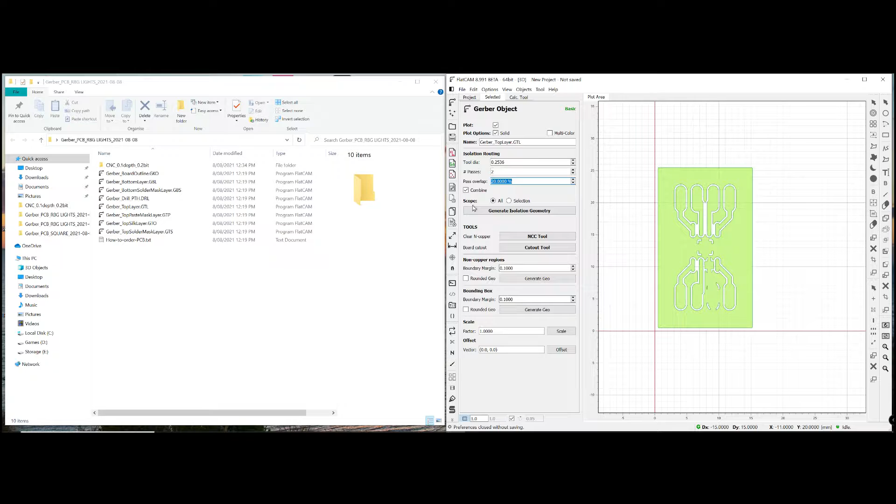The next thing we're going to do is click combine. What this combine does is basically combine your 2 passes into one file rather than 2 separate Gcodes. So that's fine - scope all, then generate isolation geometry. You see all these red lines everywhere - that's where it's going to be cutting.

Okay, so we're going to be cutting at a depth of 0.1 millimeters. Because this is a negative value, you have to put negative 0.1.

I just ignore multi-depth for the moment. The travel Z is just basically how far above the material it'll be traveling. I put 2 millimeters, which should be sufficient for a PCB.

End move is when it finishes doing its cut - how high it wants to be lifted off the board. I put this as 5, that should be enough for me. I think based on everyone's experience, 5 should be enough.

X and Y was 120, the Z at 60. Spindle speed is how fast the spindle is going to be moving. I'm going to put 1000 RPM because that's what I choose.

Some machines you don't have that option, mine does - I'm going to put it at 1000. And that's it, generate CNC object.

So you can see these blue lines - this is where the thing will be cutting on.

We're happy with that, so we save the CNC code. You can view the Gcode by clicking here, so you can see what it's doing.

I'll just click save, and we'll create a new folder so we're going to pop everything in there. So CNC, 0.1 depth, 0.2 bit, and we're going to say that is 2 passes.

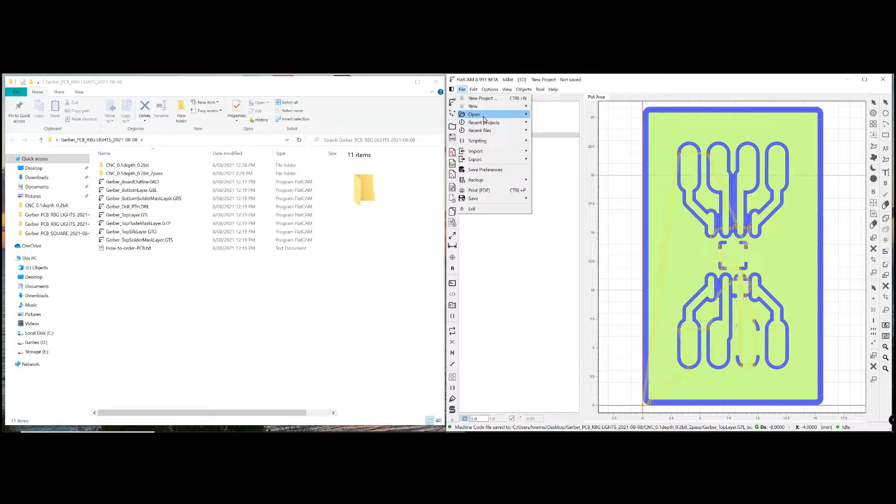We'll go to File, Open, Open Excellon. Go to here, here, okay.

The one that we wanted is this file here, the Gerber drill PTH.

Now we need to move this as well so that it aligns to here. So click here, move, here. So this is where I want it to be, and there we go. Now that's where the holes are going to be as well.

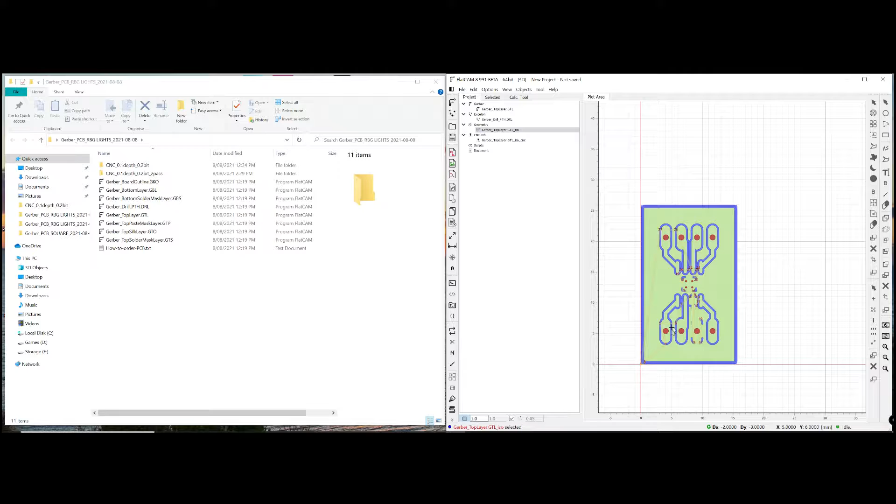For me, I don't need these holes here and here, so I'm going to remove them. The way you do that is you right click, edit. This menu will allow you to do some changes.

Actually, I should probably close the editor because I'm not going to do it here. No.

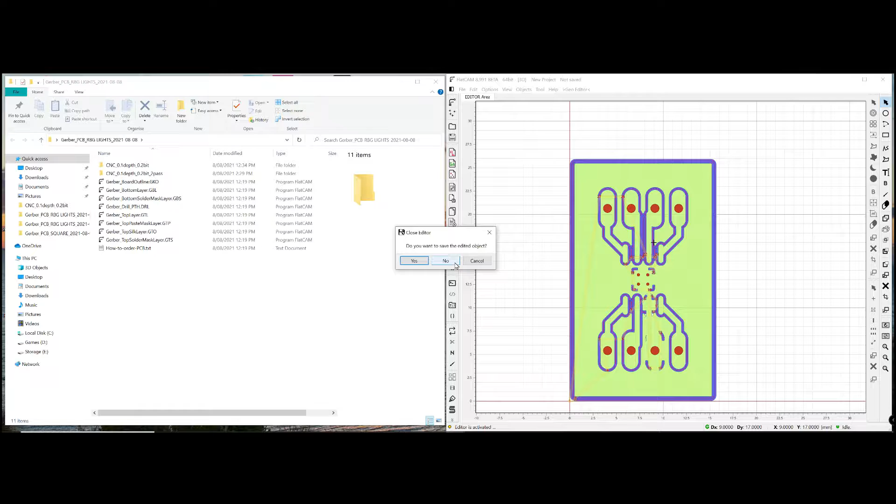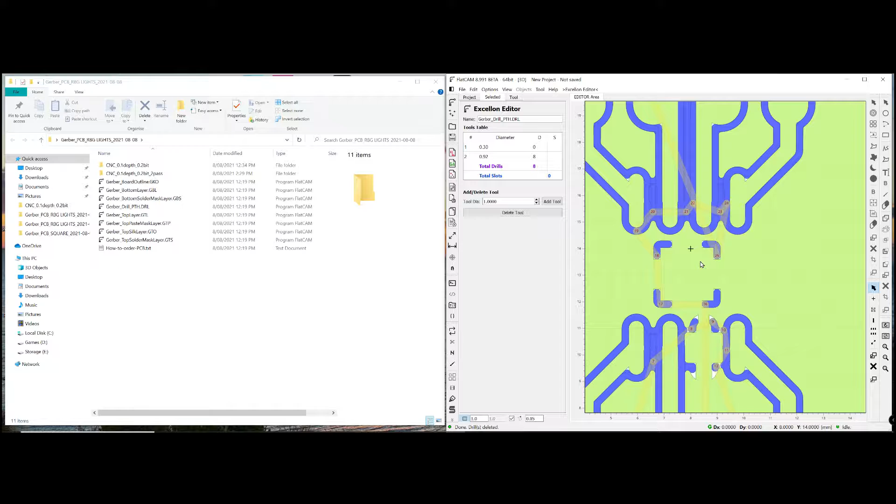Drill path. Right click, edit. This menu pops up, great. So I don't need these 4 crosses, these 4 holes, sorry. I'm going to click delete drill and just click on these ones, then press delete on the keyboard repeatedly. You can see the count going down. That's good, so we only have 8 holes to drill, which are just these big 8 ones.

Once that's done, just right click, close editor, and save your changes. Now the original drill path is still available, so we're going to right click and delete that. We don't need it, and that's it.

Now we haven't done anything in terms of converting to Gcode yet. Now we're going to do it for the drill path, so double click on the drill object. The depth for this one will say negative 2 millimeters, because we're going to create holes. Travel Z, we're going to leave as default and end move.

This is the reason why you'll see in the video that my bit breaks, because I put 0.5 whereas this is meant to be 5. Feed rate 300, that's fine. Spindle speed, I'm going to put 1000 like before, and then create Gcode, and that's it.

The bit that I used for this was 0.7 millimeters in diameter. And then create Gcode, and that's it.

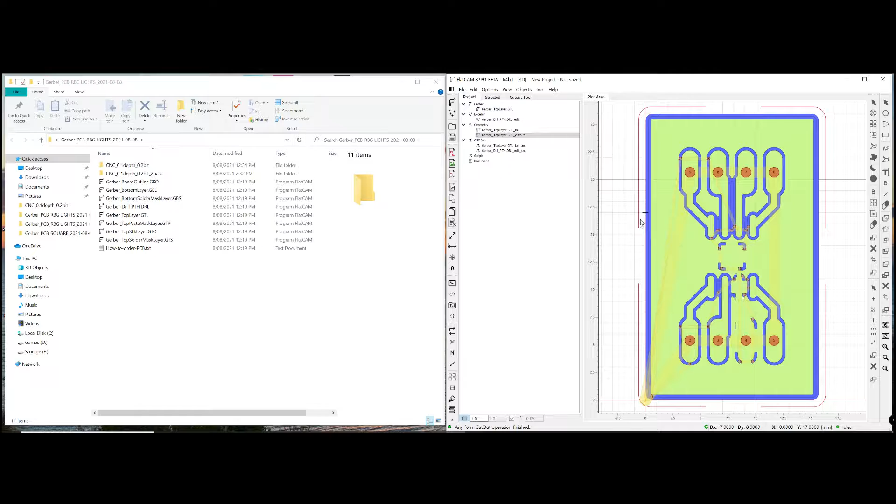The gaps are basically where you want the tabs to be. I like to use 4, and then create generate rectangular geometry, and there you go. So basically, it will start cutting here, here, and then here, here, here, here.

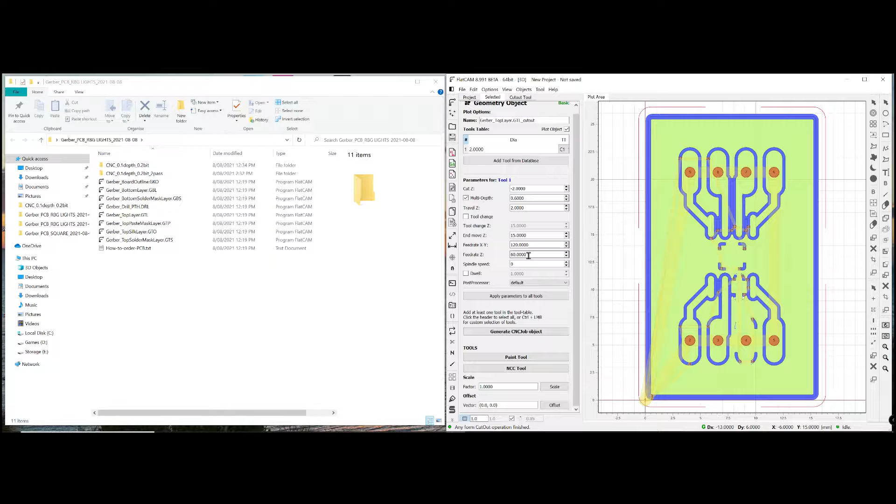Okay, once that's done, you go back in there, and then generate CNC object. So negative 2, 0.6, 2, 15, 120, 60. Actually no, end move for this is going to be 5. Okay, that's it, and generate CNC object.

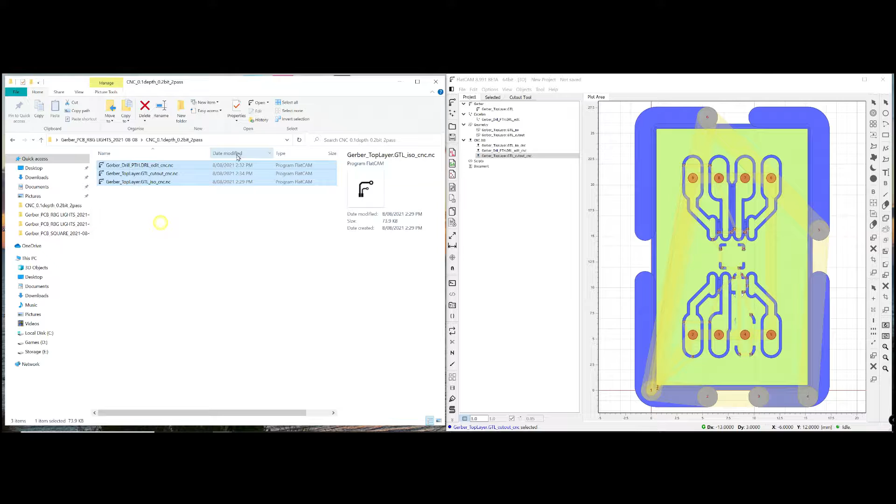There you go. And then save CNC code, save it. Basically you've got the 3 codes that you needed, saved here on my left side, you can see it here. 2 passes. Basically you just transfer this to the computer you'll be using to run Candle, and we'll go from there.

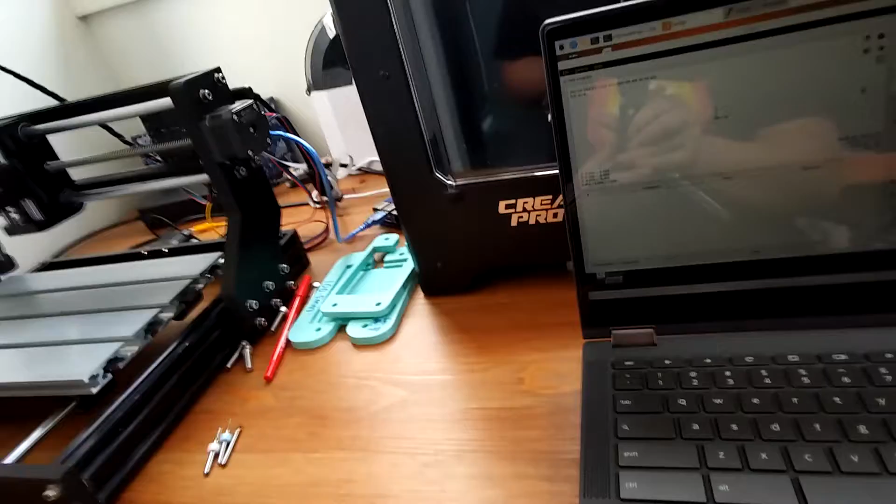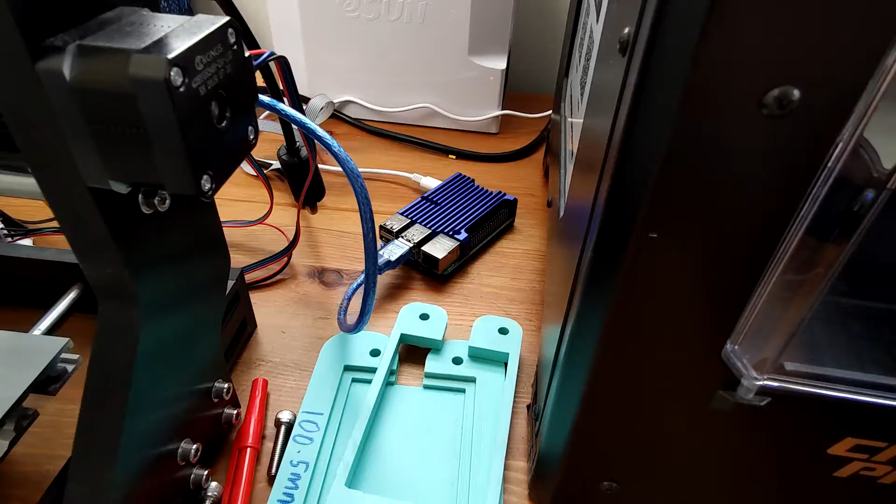Okay, so we're going to start off with the software. I'm using Candle to control the CNC machine. I have a Raspberry Pi running, communicating with the control board, and that's the CNC machine. These are the bits I'll be using. This one is the one I'll be using for doing the isolation routing. This one will be used to drill a hole into the PCB, and this one is used to cut out the PCB by creating tabs.

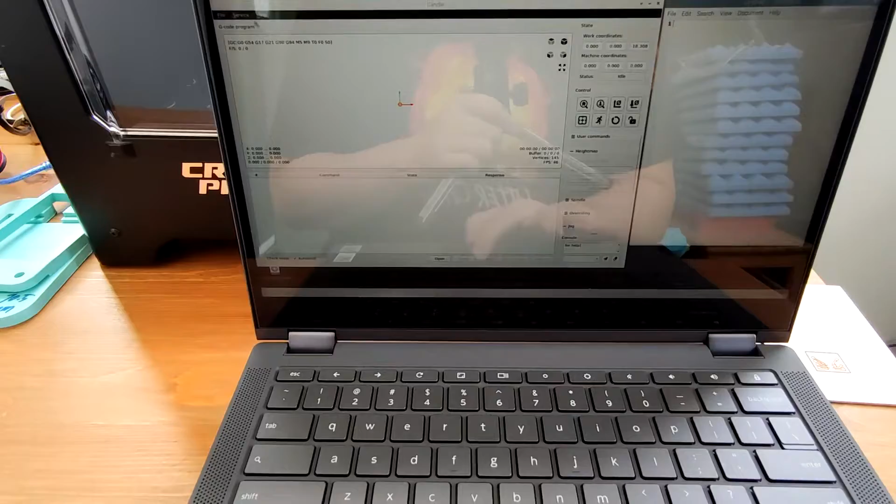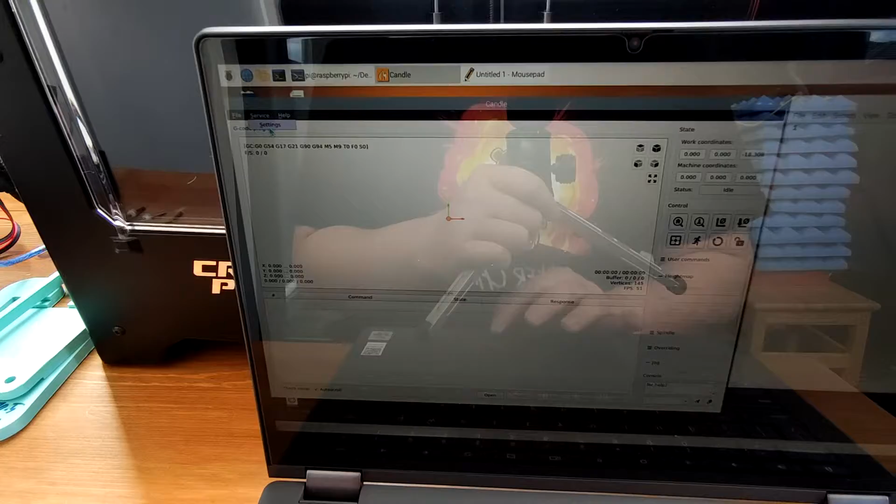Okay, so we'll begin with the software. Right now I've already paired it up, so just go to Service, Settings. Service is up here. In terms of how it's going to work, it's the same way regardless if you're on a Windows PC or perhaps even Mac. So this is a remote login, not virtual, sorry, remote logged into the Raspberry Pi right now. So we go into Settings, and we'll see this menu.

Choose the USB port that's connected to the CNC machine, and then set the baud rate to 115200. This one is ignore error response - I untick this. You want the error message to pop up, but if by accident you click ignore responses in one of the pop-up messages, just come back to settings and disable this, and you'll be fine.

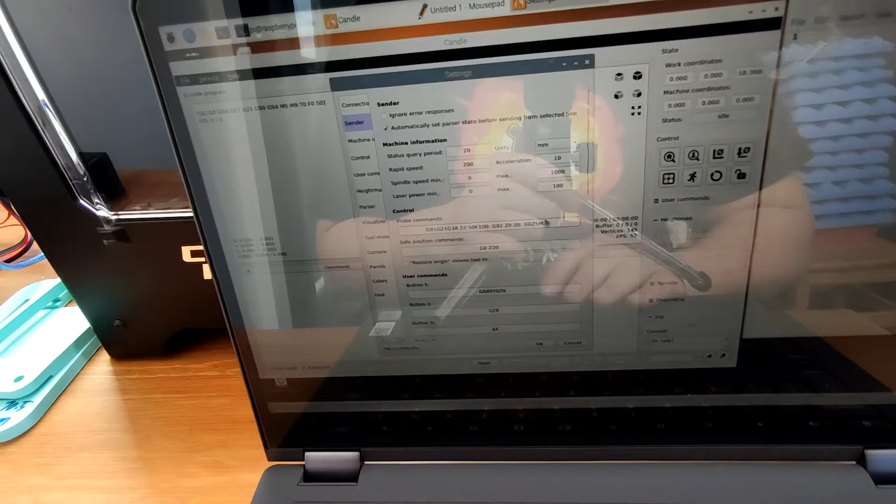These are all default values, I've not touched these ones. This particular string I copied from SainSmart's tutorial - I'll be posting a link to where you can get that. Basically, this is used for the probe mechanism to be used.

That command is by default there, you can ignore these ones. These are commands that I made myself just for usage. If you're using probing, I suggest putting the probe feed to about 50. I found that to work quite nicely.

Then after that, everything else is left at default. I've not changed any other configurations besides these ones, but these are just to display the commands being used. Everything else remains the same and unchanged. Okay.

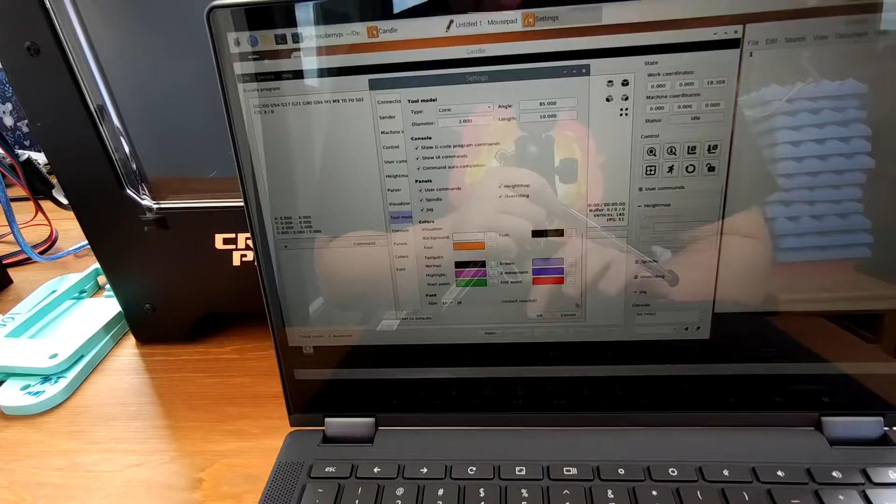After you've made those changes, I suggest closing Candle and reopening it again.

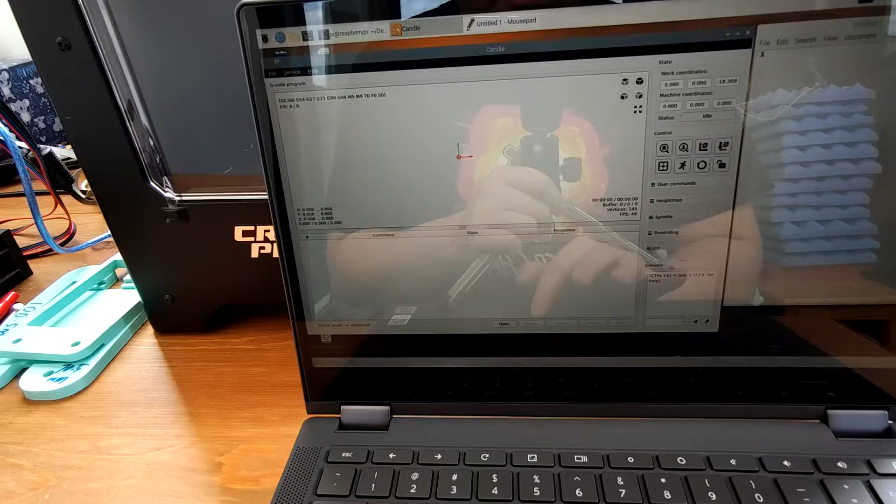Just to make sure the CNC machine is connected to your computer, the status should typically be idle. To see if it's actually able to move, go to the jog menu. Click on those three lines and it'll pop up like this.

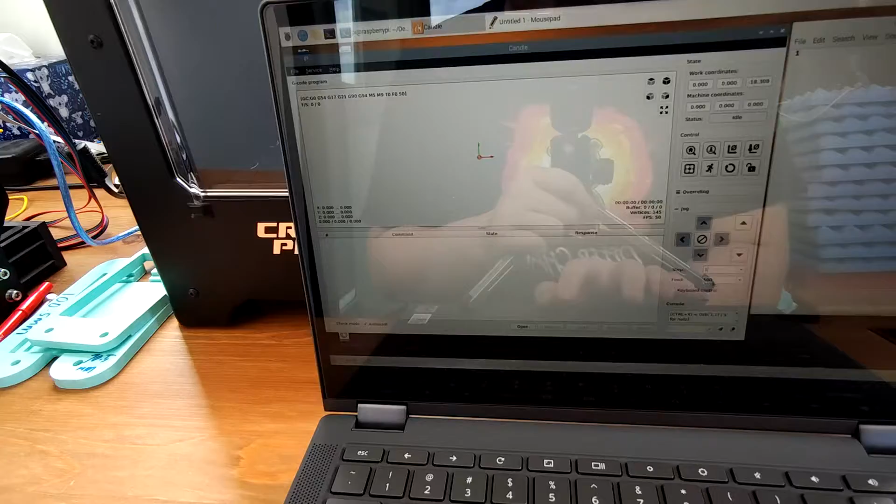Before you do anything, make sure the step is set to a small amount, because you don't want to move it too fast. So it's at 1, and the feed I found good for my CNC 3018 Pro was 500.

Let's try it. I'm going to press up and the CNC machine is going to go up. Actually, no, sorry, this is the up button, so this is actually for the Z axis. As you can see, the notes that pop up show Z minus and Z plus. If I press this one, it should go up 1 millimeter. There you go, it's working.

Before we move on, I'd like to show you my configuration. If you have a CNC 3018 Pro, you might find this useful. I'm just going to pause here for a second.

To get the configurations, I'm going to clear the console first, so this just clears everything on the console. Now just press that, and the output is presented here. You can scroll up if you want to see it. I'm going to copy whatever's in there, and then you can read it on this text file.

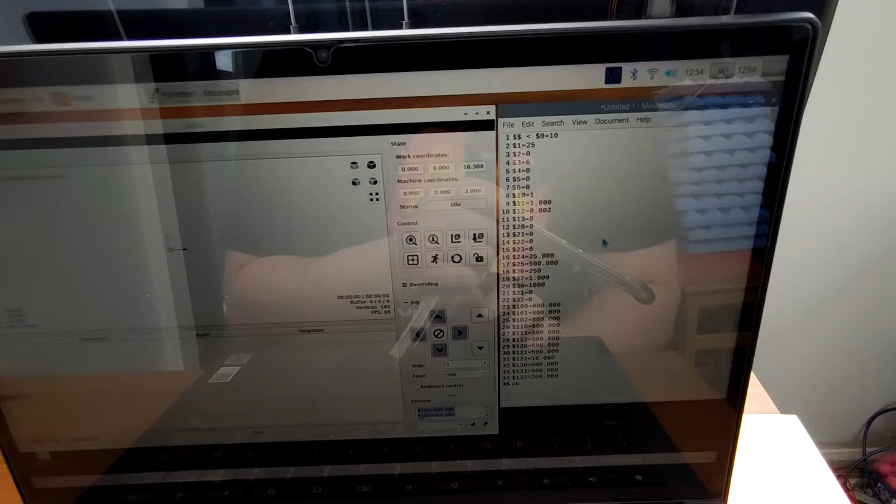These are the configurations for the CNC GRBL software running on the control board. The ones that I've changed are number 3, the $3 setting, to 6, which changes the direction of the axis rotation, or inverts them, which is the proper way of describing it. Not sure if my bookmark's still there.

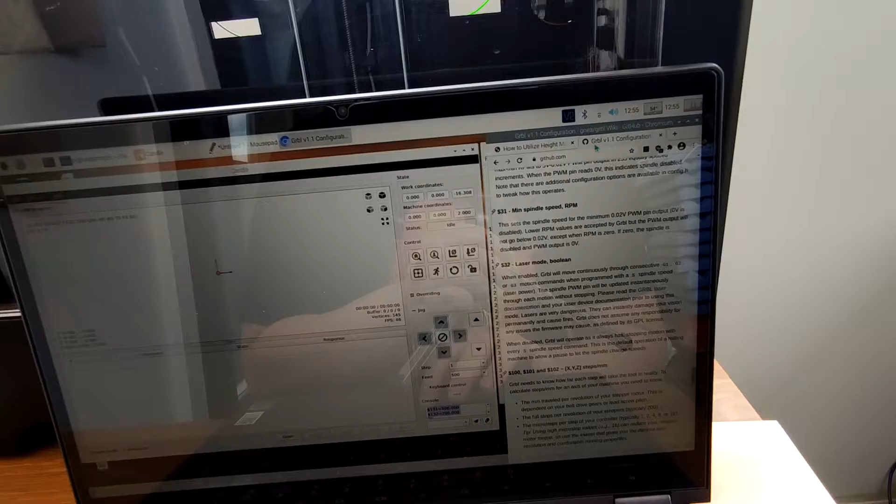Let me just pause here and see if I can get the menu up. Okay, we're back. I just went to GitHub and typed in GRBL configurations. The version I'm currently using is 1.1.f.

These are the settings for the GRBL configurations. I'm just going to scroll up here so you can see it. Number 3 is for direction port invert mask, so you click that. This is the configuration to change the direction of the X, Y, and Z axis. Just refer to the table above it.

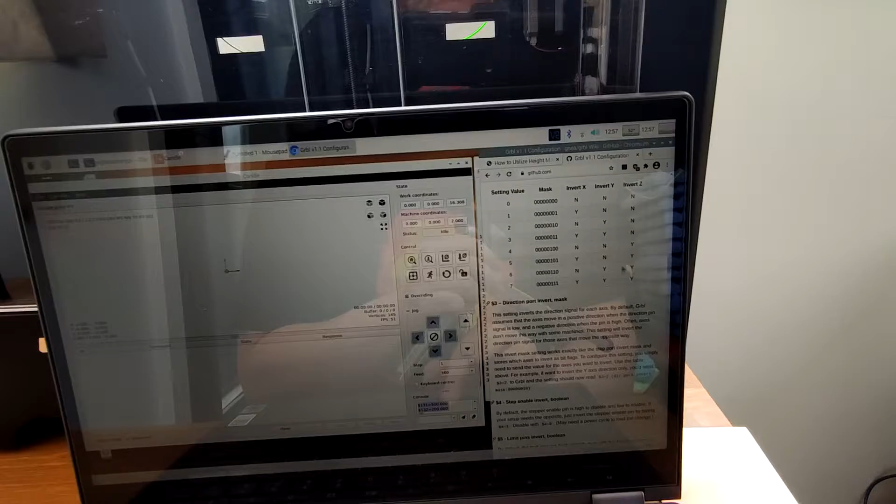So to read this table: if you don't want to invert any of the axes, set the value to 0. If you want to invert just the X, set the value to 1. If you want to invert only the Y, set the value to 2, and so forth. Right now I've set mine to 6, which means don't invert the X, but do invert the Y and do invert the Z axis.

Just going to scroll up a bit. Now I'm going back to the configuration files again. Let me see if I can make it brighter—that's easier. Okay, there we go, sorry about that. The next one, I'm just going back to the text file.

The next thing I changed is the settings for the rotations of the motor, which are 100, 101, and 102. The reason they're all the same value is because I'm using the same lead screw and the same stepper motors, so in terms of configurations they'll be the same. 100 refers to X steps per millimeter, 101 is Y steps per millimeter, and 102 is Z steps per millimeter.

The next commands I changed are 110, 111, and 112. I found that the default settings from the third-party vendor, CronosMaker, set this particular configuration to roughly 8,000, which caused my machine to stall at a certain point. So I changed 110, 111, and 112 to 500. That's all I changed in terms of modifying the configuration file.

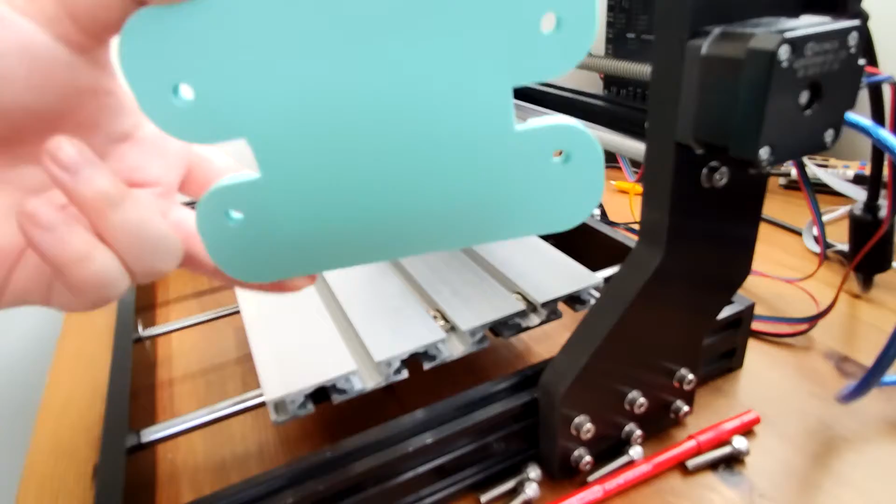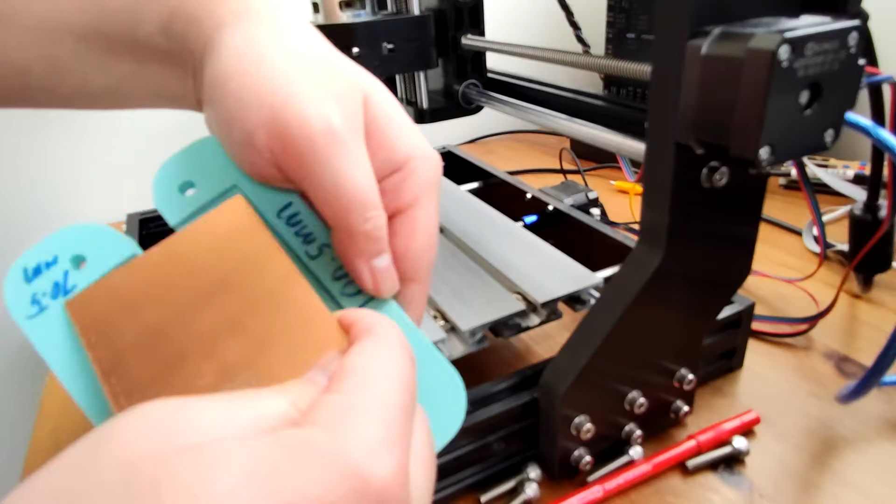Okay, so I made this, I 3D printed a PCB holder that is going to be attached onto the CNC's cutting bed. And basically I'm just going to put it in the slot here. It's going to be a tight fit because you don't want it to move.

Okay, seems to be as much as it can go. I'm happy with it there. Okay.

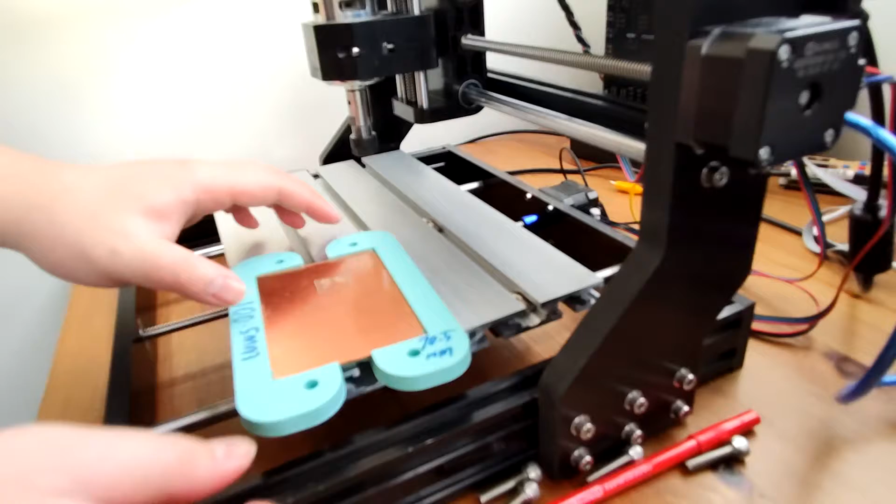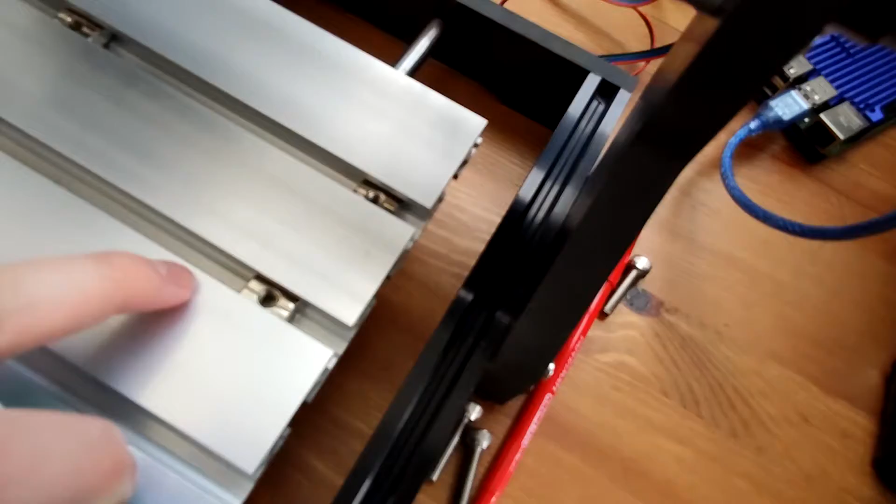So this comes in two pieces like this. This one goes up there, so you can see there's a bit of a different side. So what it does is that this is going to push it down like that and clamp it down. And within there you have your T-nuts. Here, your slot nuts, and basically some screws.

This design is not perfect, but it works, so I'm happy with that. I'm just gonna see if I can find my Allen screw. Okay, I'm back. So Allen screw, just tighten the bolts. Just find it here, fit it in there, give it a good twist to make sure it's gripping it, and just do it all full.

Okay. Align it somewhere here, and just tighten all of it down.

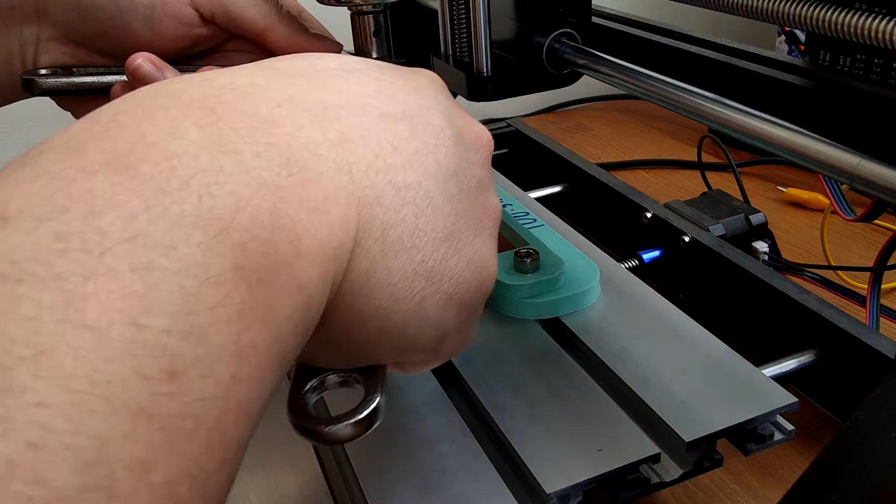Once you're happy, use 2 wrenches. One holds here, and one goes at the bottom. Make sure it's got a good grip. Then hold this one at the top, and the one at the bottom, twist it tight to the right. Okay.

And just release, you don't have to go super tight. Just sufficient friction will be good enough. Okay, there you go, it's good and strong. It's not moving.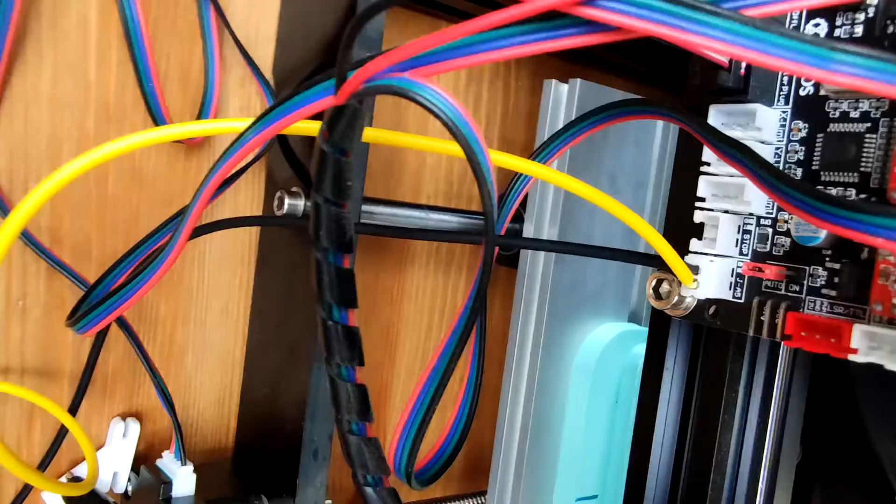Alrighty, now I'm gonna show you how to do probing setup. We'll go to here. So I have mine connected to this board, which is from CronosMaker. I made this JST connector, and basically it's to connect to that pin there, which it says A5. So A5 is the signal from the board to figure out if there's continuity or not.

So basically my probes are these 2 alligator clips. The black one's ground, and this one provides a 5 volts potential. Okay, so connect the black one to the PCB.

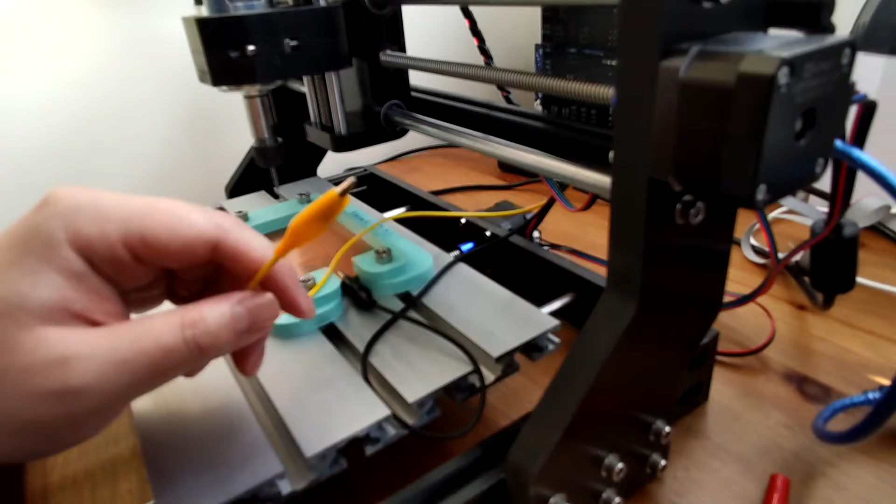Okay, sorry, I'm just going to zoom out so you can see the whole thing. And then the yellow one connects to the spindle. Okay.

Some people like to put it on the top of the tip over here, some people like to do that. It still works because there's continuity from here to here if you just check it with a multimeter.

But before we do all this, just make sure that your connections on the board are good and fitting, and there's continuity there.

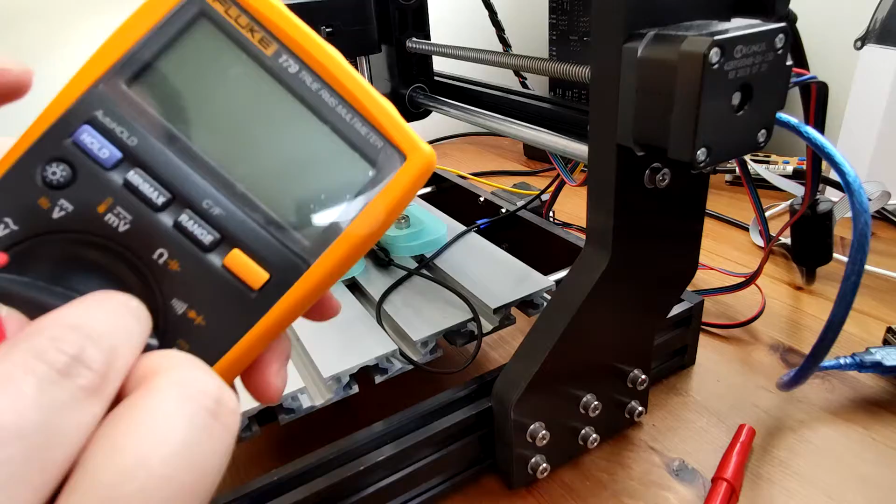I suggest, as a handy tool, always try to get a multimeter. For continuity tests, we're just going to be using this symbol here, and this is the setup for continuity. So ground, the common ground, and then the diode symbol there.

Okay, so we're going to use the multimeter and probe. Most multimeters, when there's continuity, so if you touch each other, it will beep like that. It means there's current flowing through it. Now, just to show you there's continuity on the copper board, I'm just going to touch two sides.

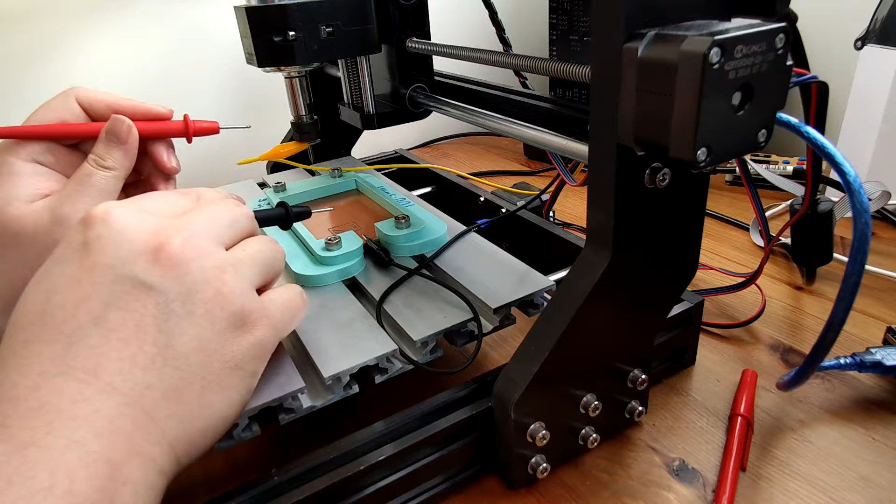There you go. So there's continuity on the copper board.

All right. Now if you want to measure the continuity for the probe, you need to measure voltage. Same setup, you're not going to change that. See voltage, V, and grab. Move your multimeter to voltage.

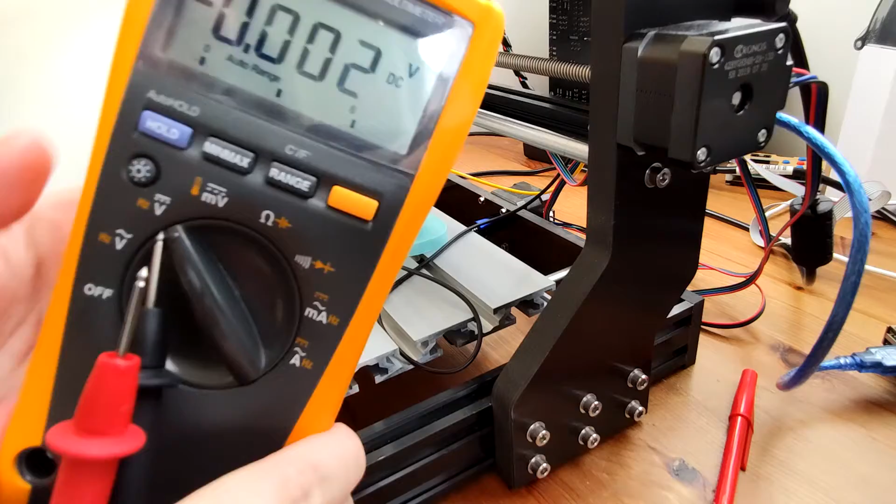And then you measure the voltage, using any of the probes. I usually use the black one, the negative, to the black Aligator Clip side here, and then the red one to the tip spindle, and you'll see a potential of 4.9 volts, around 5 volts. So that's good. It means that your Aligator Clips or whatever probe you're using is connected successfully, and there's no fault in the line.

All right, so now we're going to do a continuity test. Now we have that part set up. We'll go back to the software. I'll probably have to hold it.

This out a bit. Okay, let's see how much battery I have left. Let's check the batteries. Cool, now let's see.

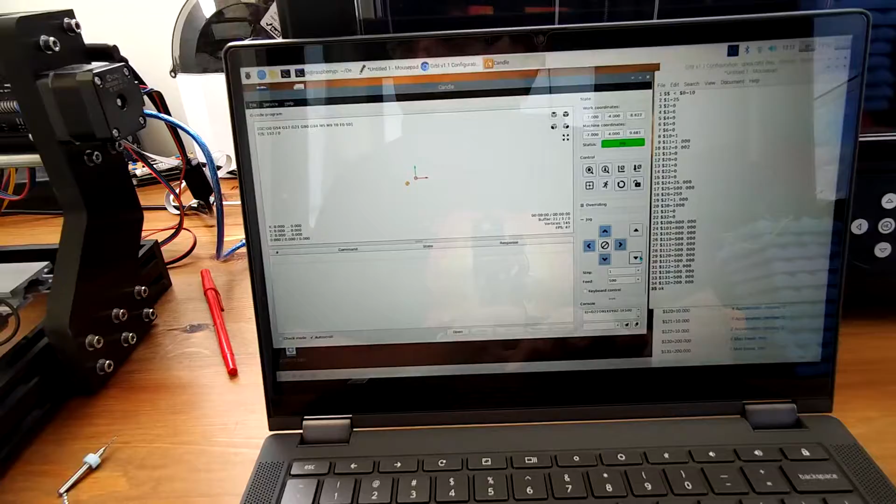We're gonna jog the x-axis here, and we're gonna move the y-axis down a bit. There, then we're gonna slowly lower the z-axis. So right now we're just going to try to do the setting of the offset, zeroing off all the positions.

Okay, I'm going to cut the PCB around here. So I'm just going to try to find where it's going to be. I think there would be a suitable position.

All right, so right now I'm just going to import my isolation route. Right there, so this is a file that I've created previously, and choose the isolation. This is after you've converted to Gcode by using a software. I use Flatcam, I might give a tutorial for that in the future, but for now I'm just going to assume that you know how to use Flatcam. If not, I'll share a link of a tutorial that I found on YouTube.

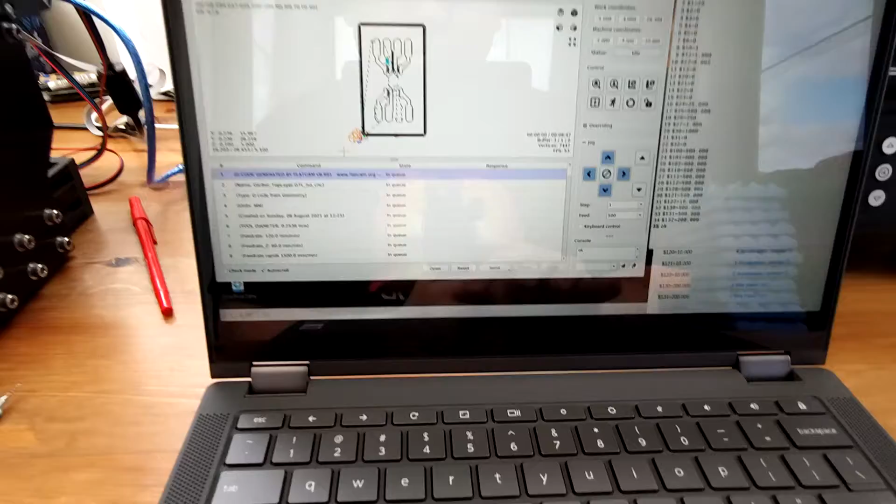Here is the isolation routing, so this is my PCB that I'm planning to do the isolation routing for. Now what I'm gonna do is show you that this is where the 0,0 position is, as in where the tip of this bit is gonna hit first.

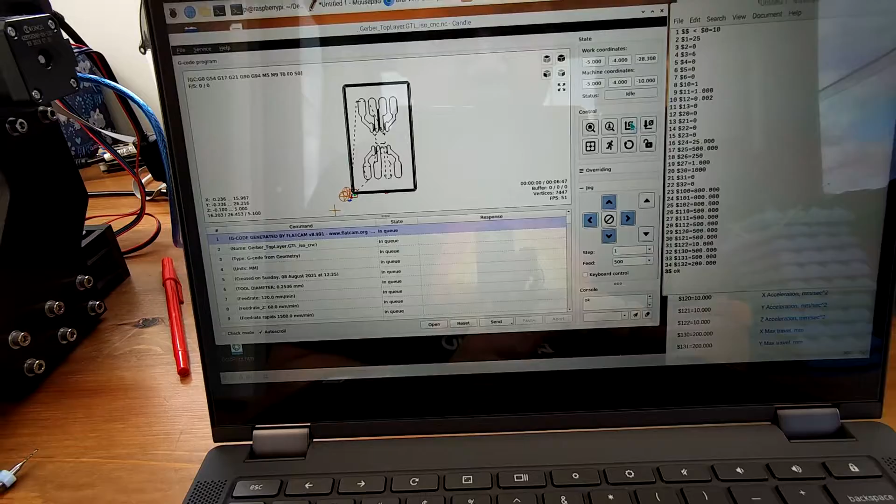So right now, we've already selected where we want to cut. Now we just need to tell the computer that that's going to be the 0 point, the origin. So for this one, we'll click on this item to say that we want to 0 the x and y position, so you can see 0, x, y. Okay, don't touch this one, ignore this one for the moment.

Now, because we're using a Z probe, we can press this one, and what this does is move the spindle all the way down until it touches the copper board, and then once it figures out the height, it'll go back up.

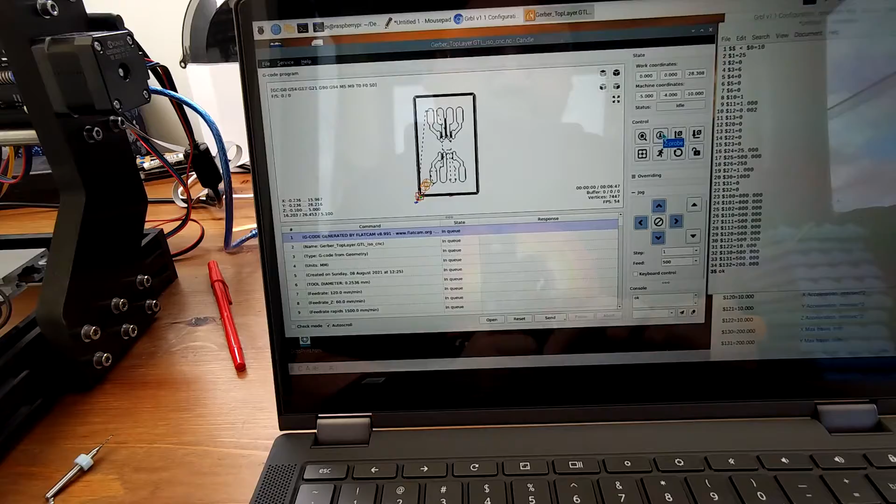I'm just going to give you a 3-dimensional view of this so you can see the thing in motion. Actually, correct that, we'll zero the xy. Now we're going to 0 the z.

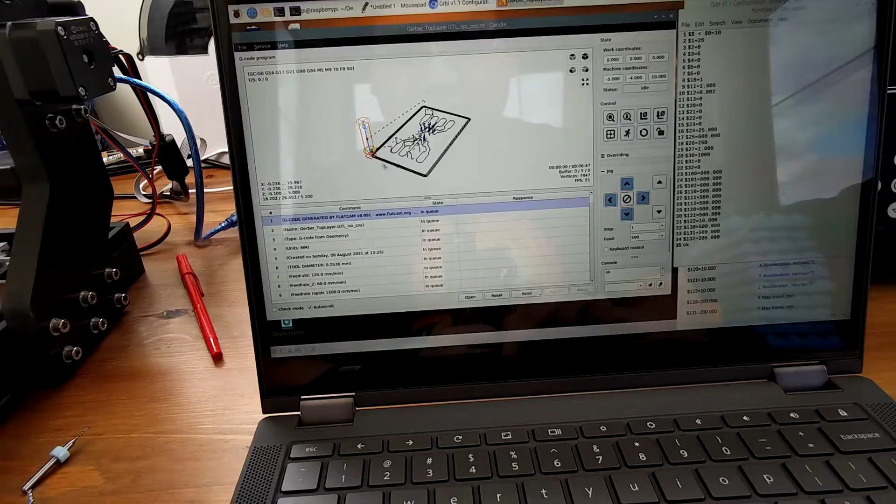Okay, so it's thinking it's there. Now we're going to do the probing, and it will redo what this did. So we're going to press this, and that's it.

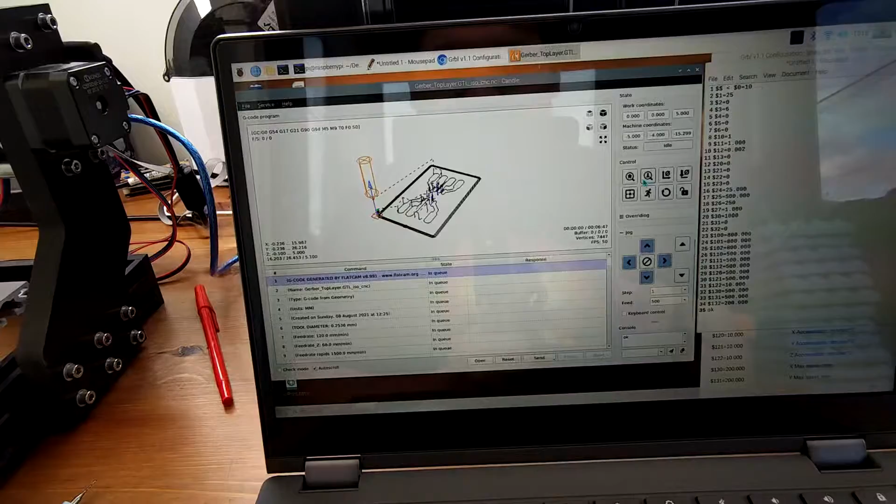There we go. Just to show the animation that's occurring, so press this again. It's going to go down, touch the board, and then come back up because it found the position already. And that's it, that's all you have to do.

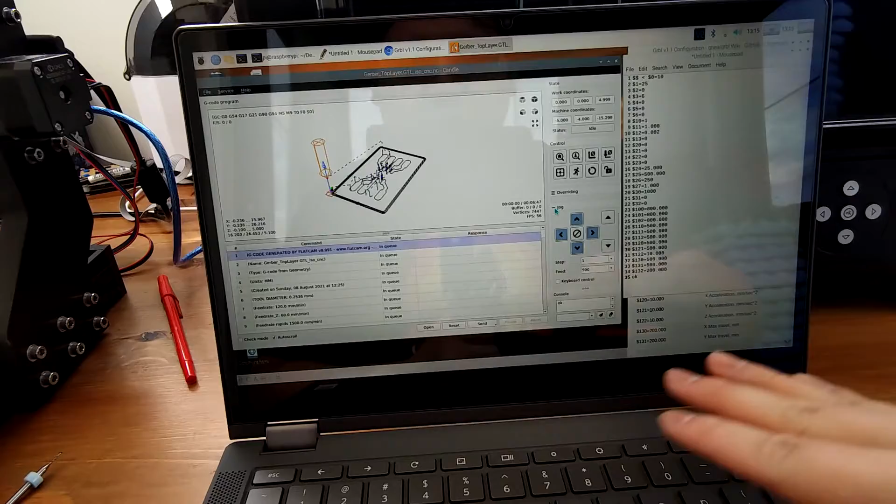Okay, now to cut PCBs, you will need to create a height map because the copper boards are not 100% flat, there are uneven surfaces.

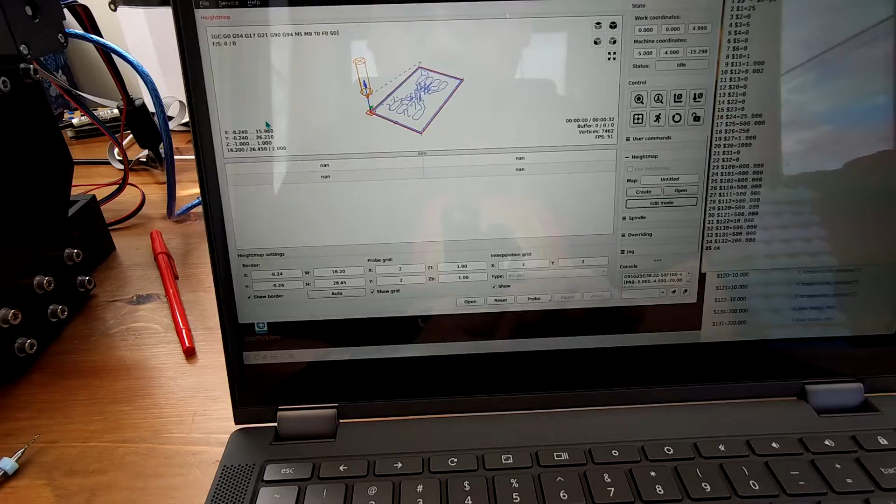So we go to this option called height map, we click create. Once you go into the height map menu, you click auto. This will just basically create a red line border around your PCB.

So my PCB is about 16 by 26 millimeters in dimension. The rule is that you take the number 16 divided by 10, which gives you 1.6, and then round it to the most significant figure, which is 2. This is 26.45 divided by 10 gives you 2.6, round it to a significant figure, that's 3. So for the X, we put 2, which is what we calculated. The Y-axis we calculate as 3, put 3 there, and that's it.

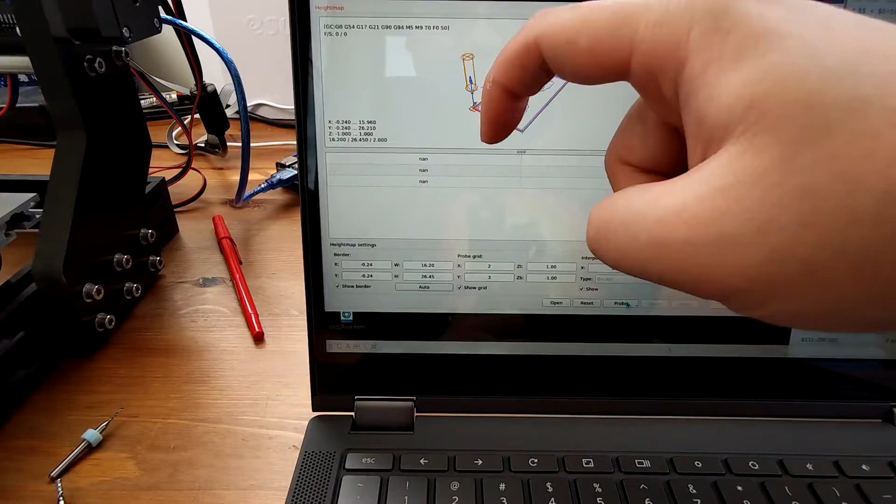Then everything else, click show for all of them, and then all you do is click probe. So what it's going to do is go down and get points at each section to measure the height, and then basically the software compensates for the difference in height as your Gcode is running. So we do probe, and it's going to do 3 plus another 3, so that's 6 points it'll be probing.

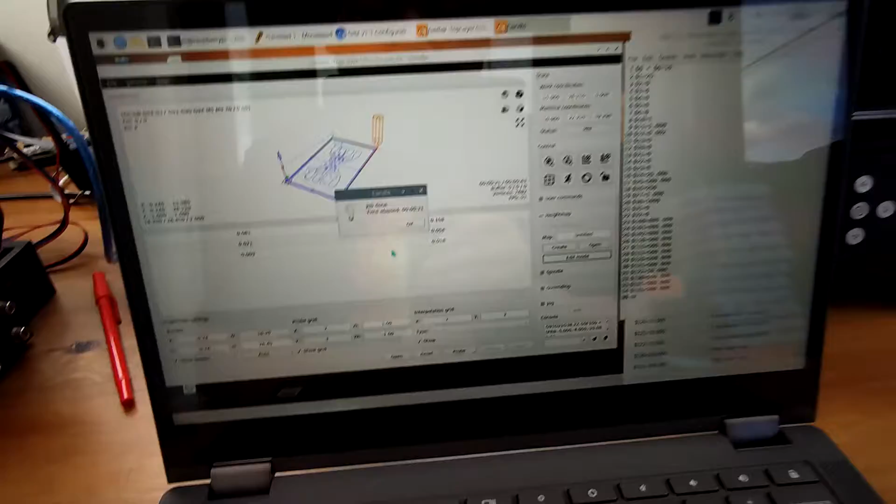That's 1, 2, that's 3, that's 4, that's 5, 6, 7. Okay, so once that's done, it will say job done, time elapsed.

Press OK. That's it, the probing is done. The height map has been created. You no longer need this, so before you do anything else, remove this once you're done with height map and probing. This one can stay on if you wish, but I don't need it. I'm going to yank that off.

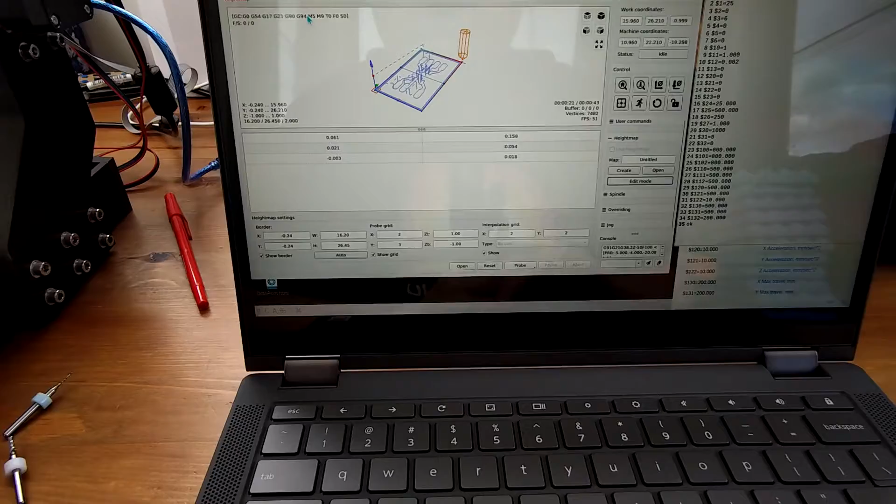Okay, now come back to the software. We go to File, Save As, and this helps you save your height map. So you just do test.map, and we click Save.

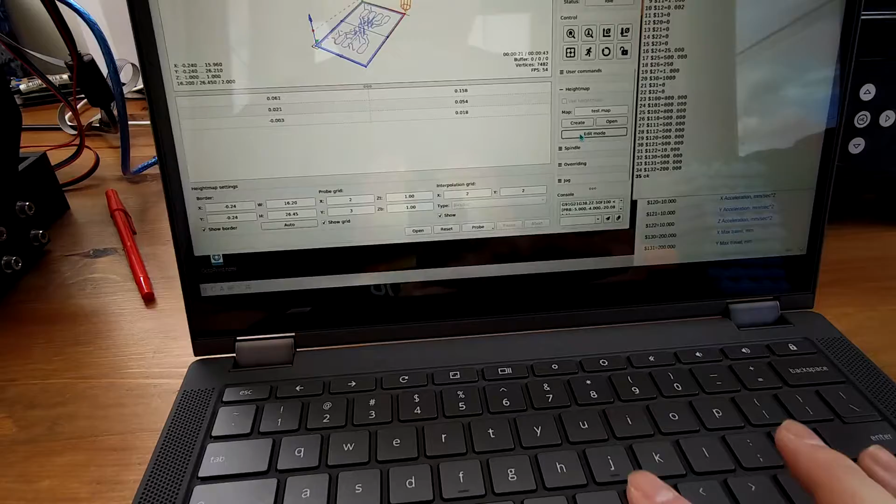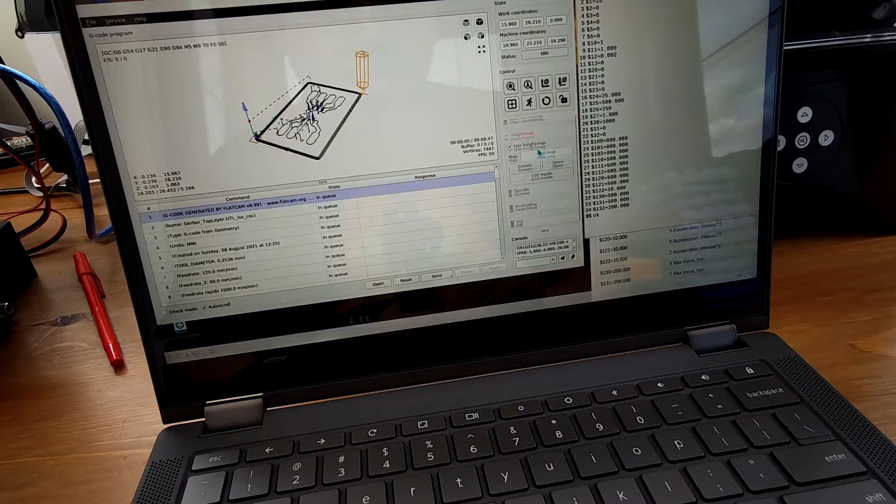All right, now click Edit Mode to get out of the height map menu, and then come back here, click Open, find where your map file is, and open that, and then make sure that you click Use Height Map. Make sure this tick box is selected, and then that's it. So double check, make sure everything's removed, everything's been positioned.

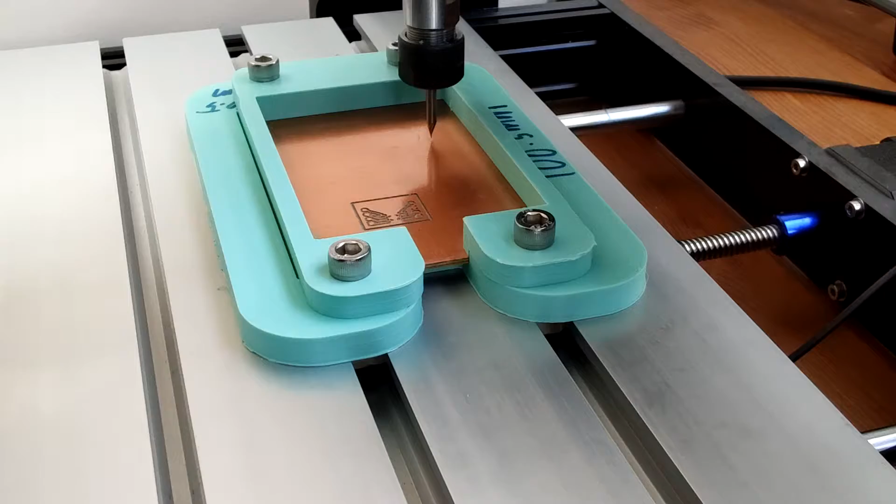And then all you do is click Send. I'm going to pause the video here for the moment. Okay, so now we have set that up, I'm going to click Send here. This button at the bottom of there. So height map's done, everything's done. Click Send. Things will start moving. And there we go.

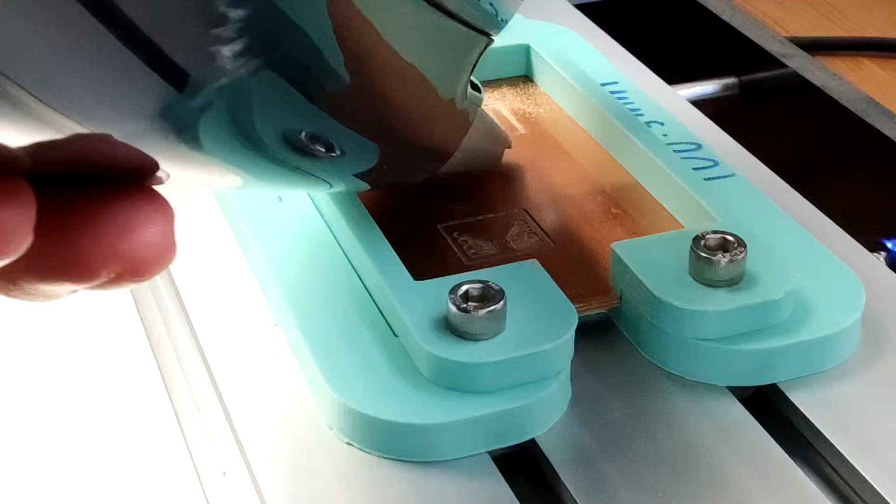I'll show you the cleanup first. I'll clean up the rest at the end, but just to show you what it looks like. There you go, so that's the isolation routing part done.

Now we're gonna do the drill hole. So I'm gonna pause the video here. Okay, since we're gonna do the drilling hole, I'm gonna lift this up a bit.

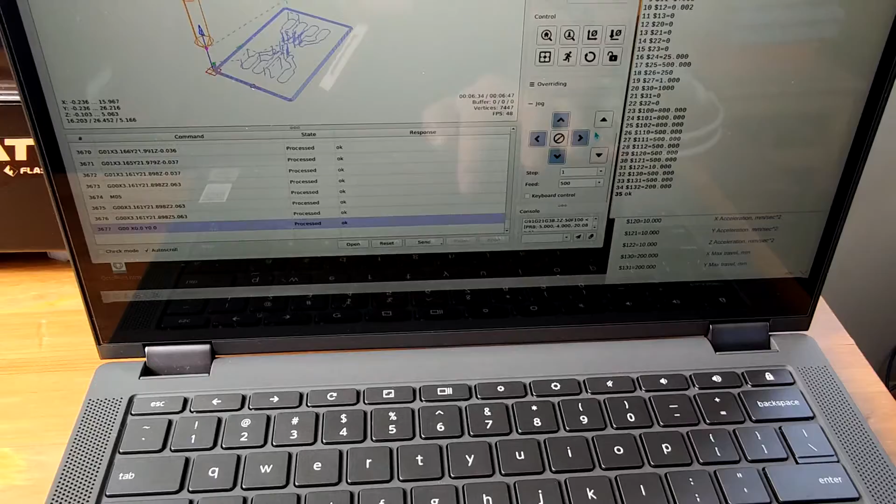So make sure you don't home anything, just move this by jogging the machine up. So go to the jog menu. Make sure this is a step 1 and just press up. Okay, probably just go as high as you possibly can.

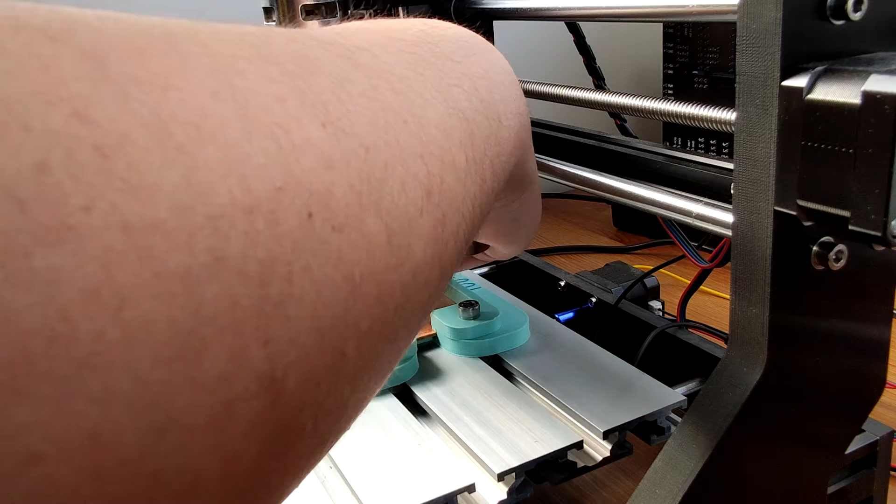I'm going to change this bit. Turn to the left hand side to loosen. That's right. Yep, there we go, bit's out. Put the drill bit in. Probably going to vacuum a bit more.

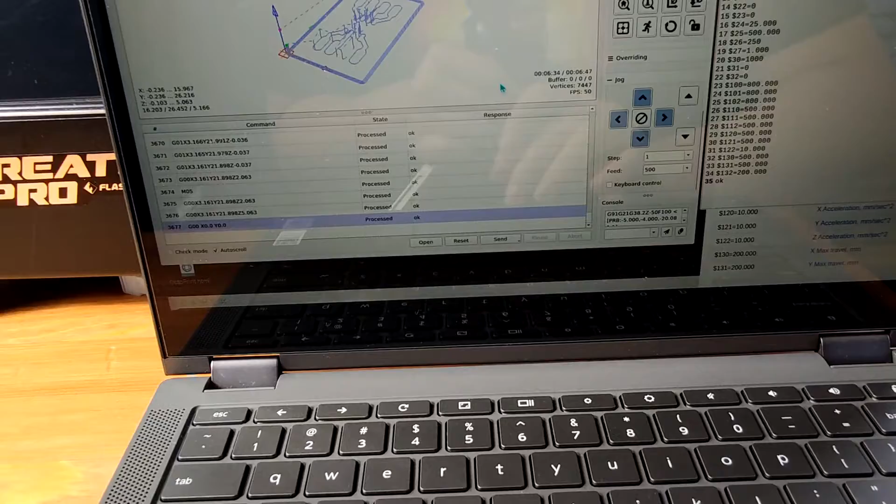Okay, come back to the software. Now we're gonna go file, open. We're going to do the drill hole, so DRL. Open that one. So that's basically the operation of it.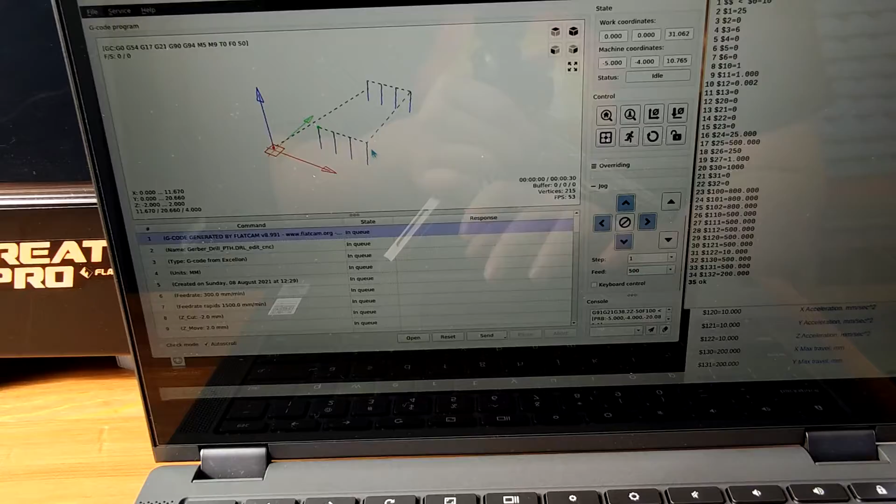And all now we have to do is basically click send. So basically, technically, the software will go to the 00 axis first and then start drilling, because then you'll know where the origin is, since we've moved it up. But because we've already set where the 00 is based on these ones, it should be fine. Click send.

And it broke my bit. Okay, so that means I didn't put the height high enough. But that's okay, I'll just have to buy a new one.

Okay, now we're going to do the cutting out of the PCB, so we're going to move the Z-axis up so that we can replace the bit. Yes, it's broken, so that's pretty sad. I have to buy a new one, but still learning, so it's fine.

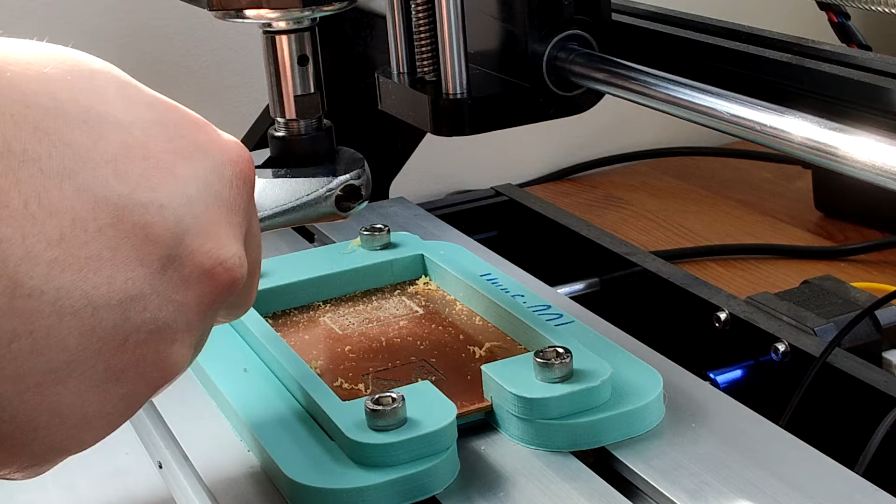There, goes here, and then turn left, loosen. This should just come out. So go check this out, so you can just see what it looks like at the moment. That's how the PCB is looking.

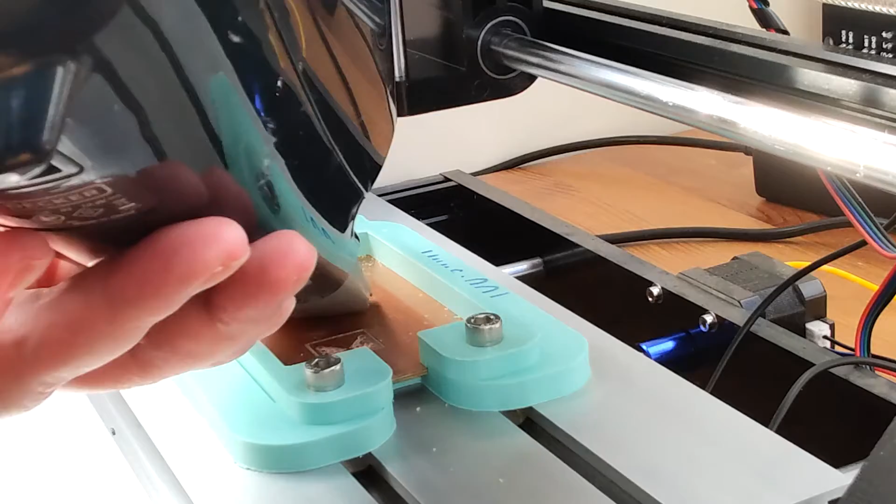There we go, might be easy to see now. Okay, next step is the cutout, so we're going to change it to this one here.

Tighten it up. Okay, let's tighten. That's not coming out, and make sure that's straight down. Good. Okay.

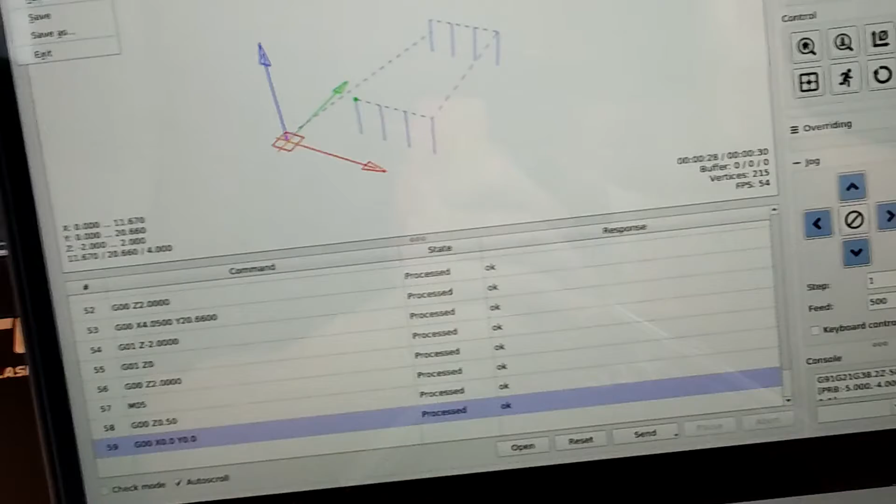Now we're just going to do the cutout. So click on the cutout Gcode. I'll zoom out a bit. There we go, cutout Gcode. Open. So that's where it's going to cut.

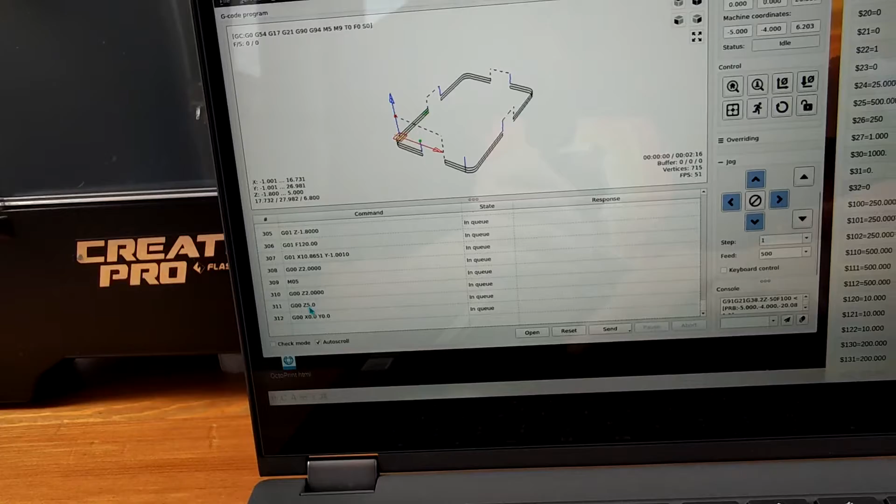I make sure now that the end travel for the Z is at 5 millimeters rather than 0.5, so that hopefully will save my bit. I'm not sure, but we don't have to do anything else. Now we make sure that everything's tied on and everything's in position. Bit's been changed, that's been tied in. Click send.

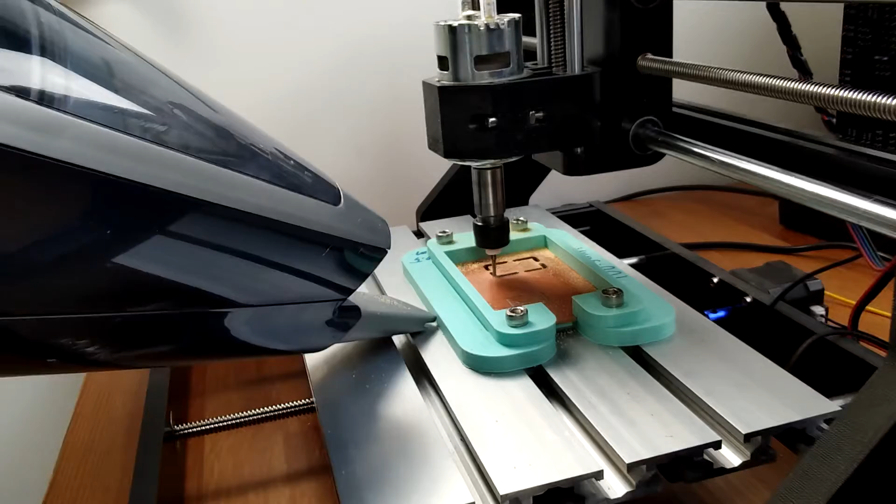PCB is done. Yeah, I'm happy with that.

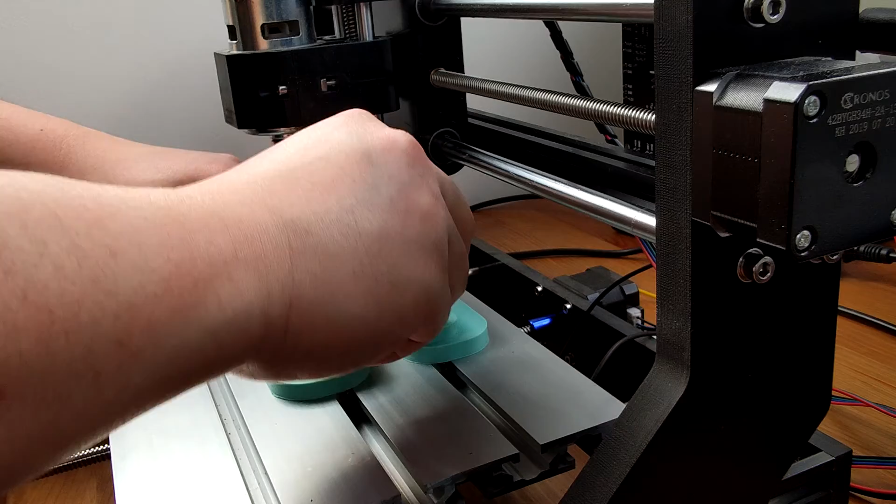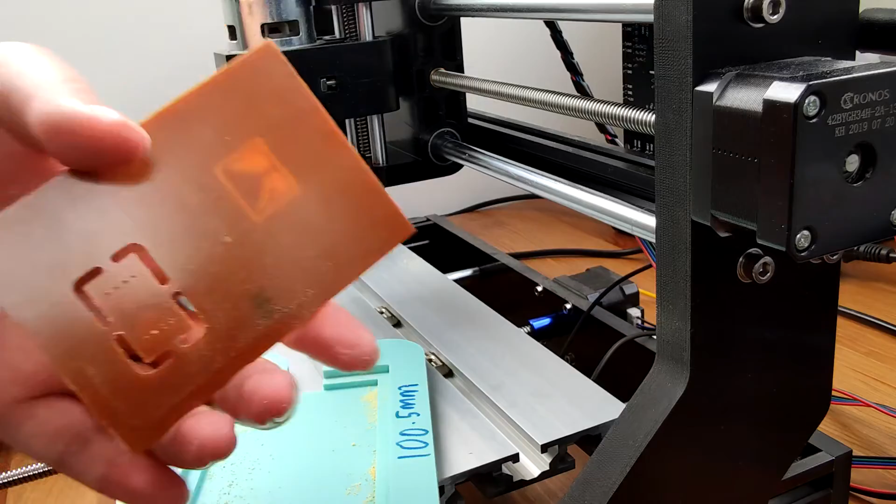Okay, now let's go remove these ones. Pop this out. And there we go.

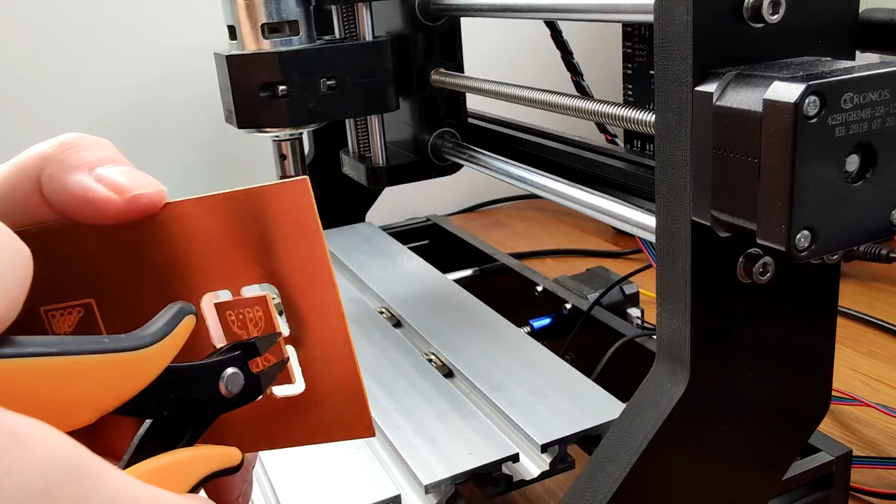We got one PCB done. So we just gotta use some side cutters and pop that out. And you can clean that up with some sandpaper or just use your side cutters, and that's it. PCB done.

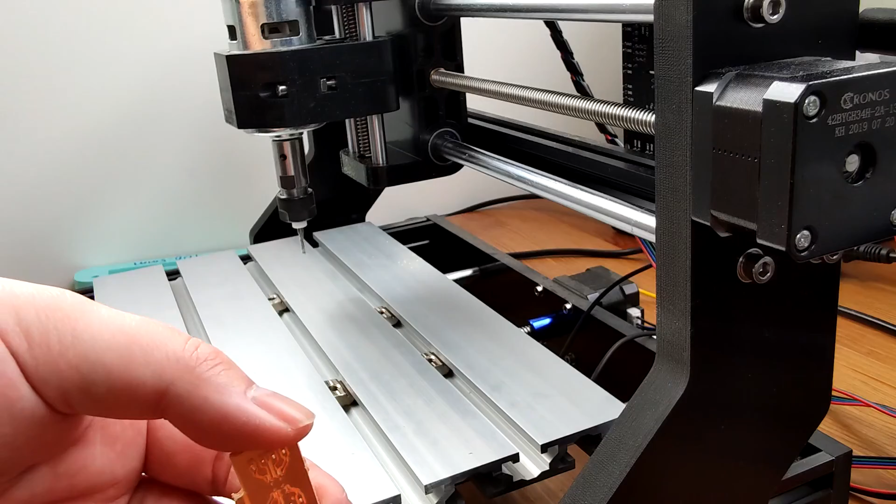Okay, so we're gonna start off with the software.